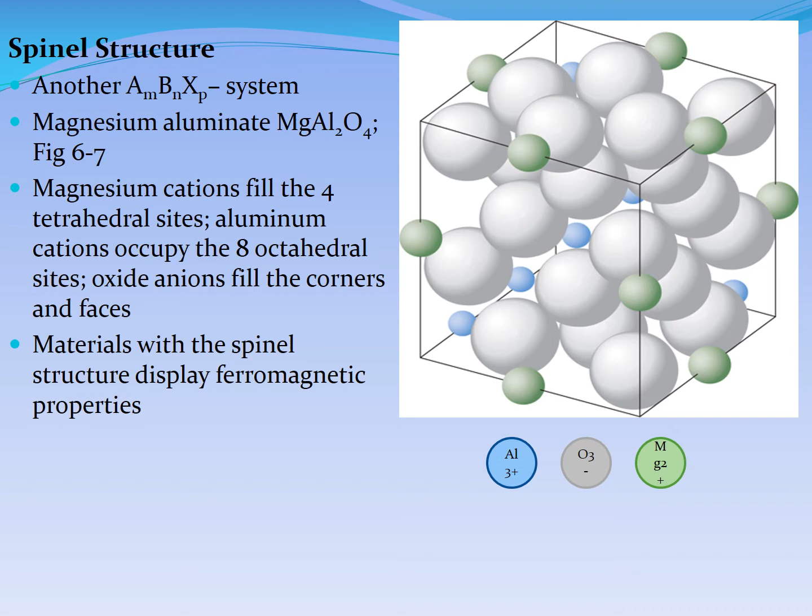But in terms of the calculations and understanding of the atomic packing factor and densities and so on, the examples we have taken are from the simple AX type. The AmXp, ABX types, you know them, but the calculations we will leave for some other time.

Phase diagrams for ceramic systems. Ceramics are represented by phase diagrams just like metal alloys. And if you remember, the most important alloy is like a ceramic in one way, right? There is a metal and a non-metal, iron and carbon, but it is a metal alloy. Here, if you say silicon carbide, then silicon and carbon make a very different one.

So the main thing is that there, for a large range from 0.5, 1% carbon all the way to 6+% carbon, the carbon and iron do not form a compound. There are phases of iron, and after 6.7%, the carbon and iron will exist completely as iron carbide. So this intermetallic compound iron carbide is in a small quantity and exists like a phase only.

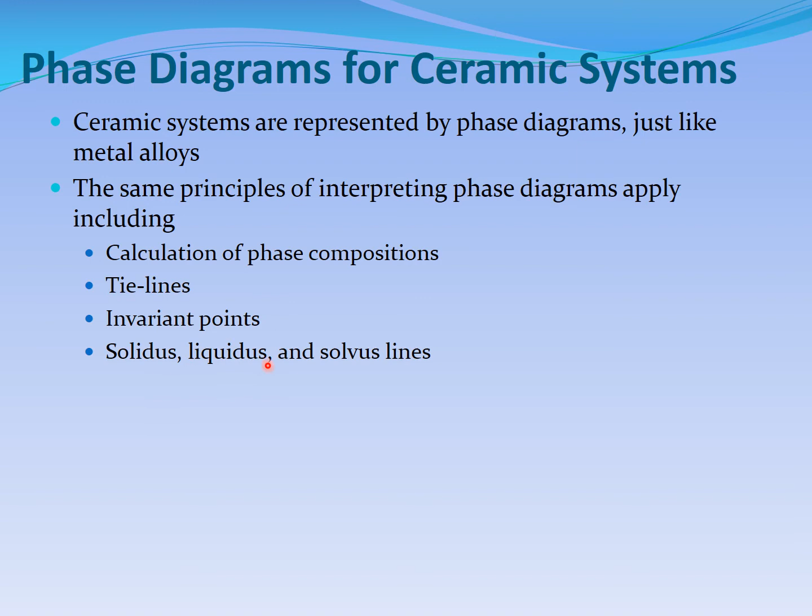Here in ceramics, the metal and the non-metal are completely there as a new compound, not in their individual phases. So this is the major difference: phase diagrams will be here also, but it will not be pure metal phase, pure non-metal phase, and so on. Same principle, but phase diagrams of a more complicated nature. Same principles for calculation of phase compositions, tie lines, invariant points, solidus, liquidus, solvus lines, all will be there.

For example, this magnesium oxide, aluminum oxide phase diagram. On one side you have magnesium oxide, on the other side you have aluminum oxide. Now these are individual compounds already, magnesium oxide and aluminum oxide, and then they exist together. So from 0% aluminum oxide to 100% aluminum oxide. And then there will be temperature.

But because this is already magnesium oxide, it is not that there is a melting temperature for magnesium and a melting temperature for oxygen. Actually for oxygen you can't say a melting temperature. Similarly here, what is the melting temperature for alumina, and in between. So there is the liquid region, there is the liquidus line, there is the solidus line, and so on.

So if you end up working in a place where these advanced ceramics are being made, first of all, any one company will not be making 10-20 different types of ceramics. Generally they will be specialized in only 2, 3, 4 types. So very quickly you will learn the chemistry and physics calculations and the materials engineering, and you will become quite good experts in a very short time.

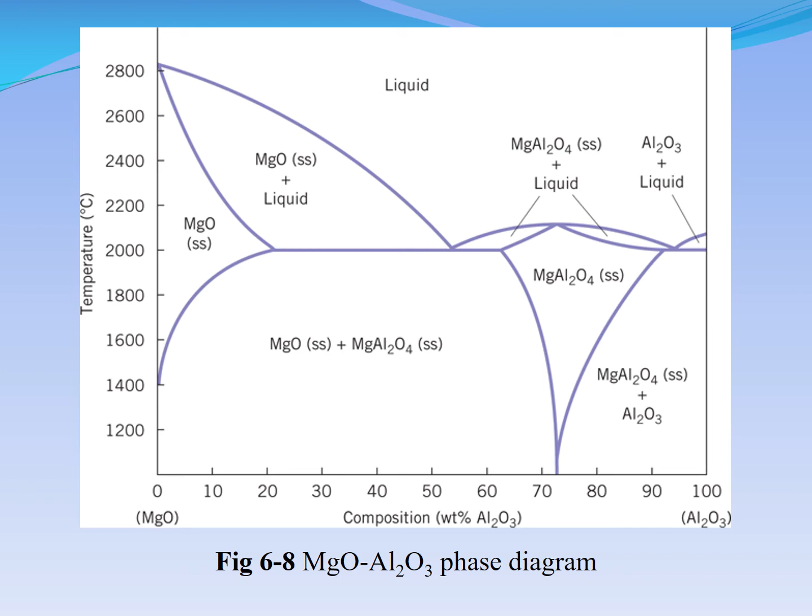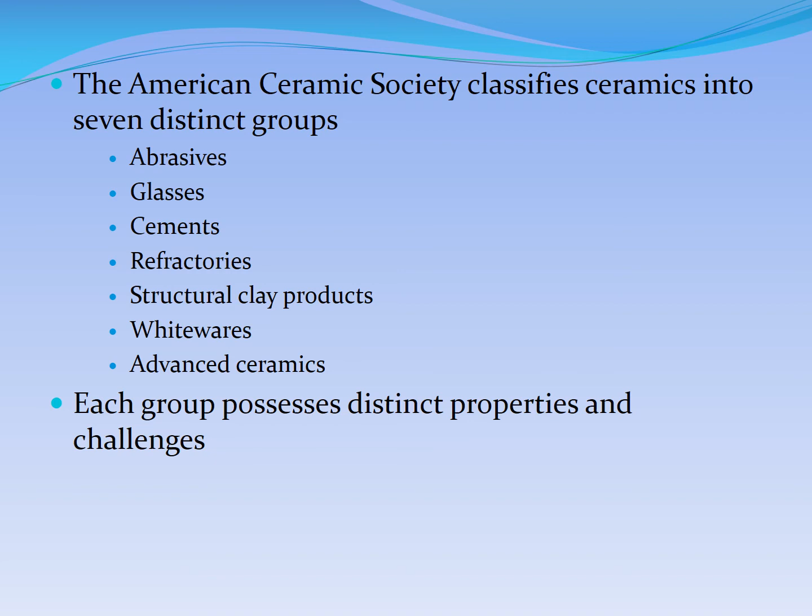What are the industrial uses of ceramics, right? Applications. So very quickly, the American Ceramic Society classifies ceramics into 7 distinct groups: abrasives, glasses, cements, refractories, structural clay products, whitewares, advanced ceramics. And each group possesses distinct properties and challenges, right? So these are all ceramics, and each one of them is a very different application and a different market.

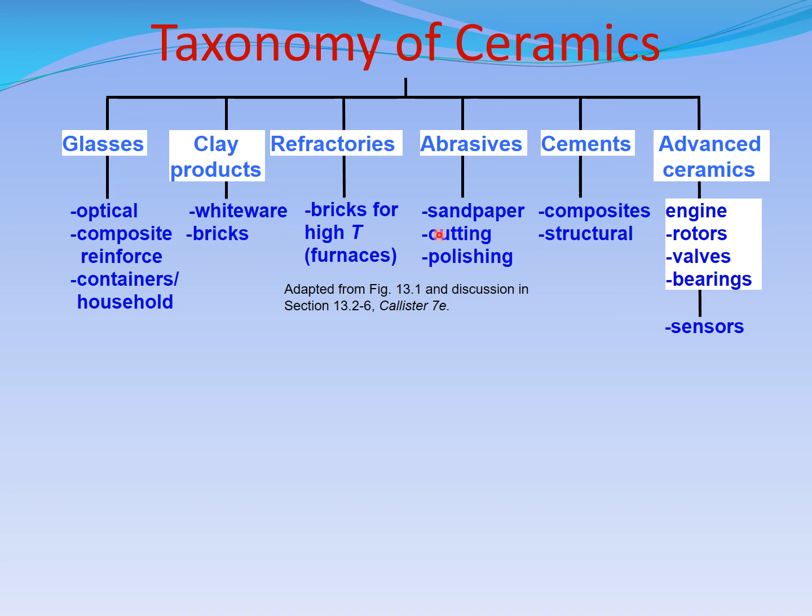So we have a taxonomy of ceramics: glasses, optical composite reinforced containers, clay products, refractories, high temperature resistant, abrasives for cutting and grinding wheels, cements, and advanced ceramics. Advanced ceramics in engine rotors, in valves, in bearings, in some sensors. So these are some of the latest ones, but in abrasives and others also there are many new developments being made.

Abrasives wear away other materials through processes like sanding, grinding, lapping, pressure blasting. The abrasive particle acts as a cutting instrument, ripping away parts of the softer material, like grinding wheels and grinding machines. Hardness is the most important property in an abrasive. Friable materials form fragments with sharp edges when they break under stress from heat and pressure, right? So abrasives are already very hard and sharp, but if they belong to the friable category, then they make small particles which are even sharper. So you apply a stress, they break, but they break into still good abrasives, right?

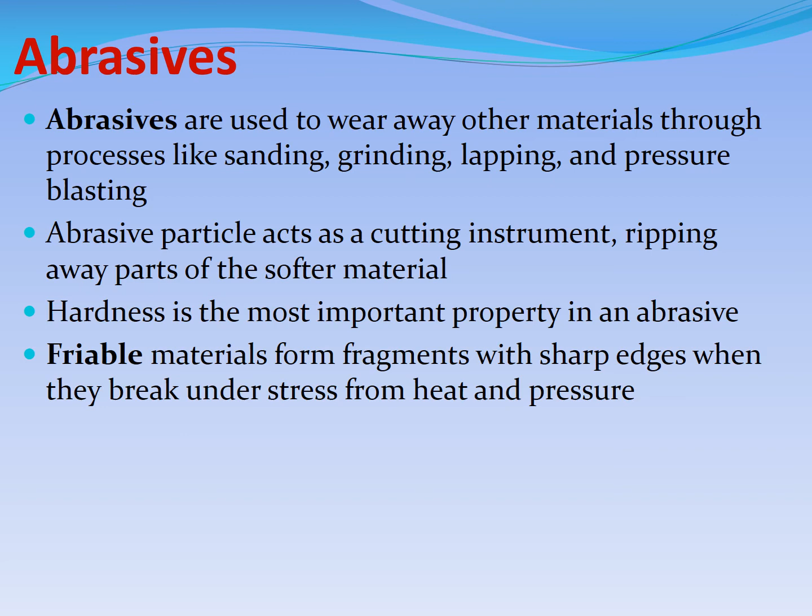Sandpaper, you have been using sandpaper from your first machine shop, workshop practice, and so on. It is the most familiar abrasive product, with hard particles bonded to a backing by a resin, like on paper or something. The earliest sandpaper dates back to the 13th century in China, where seashell fragments were bonded with natural gums to shark skins or parchments. So they were using natural skins, natural leather and so on, and seashell. They would grind the seashell and then glue it, and then use that as a sandpaper.

The first US patent for sandpaper was in 1834. Pieces of glass were attached to paper, so the name sandpaper. Modern sandpaper has evolved beyond glass. Some no longer use paper but mylar, cotton or rayon fabrics as a backing material. They are classified based on the grit size, which means number of abrasive particles per square inch. When the grit size number is smaller, it means the particles are larger, so the number of particles per square inch is small. So 40 to 60 is coarse, 80 to 120 is medium, then fine, very fine, extra fine, super fine. And uses range from stripping or large scale sanding, smoothing, final wood sanding, to removal of surface scratches. So these are different categories of sandpaper, right?

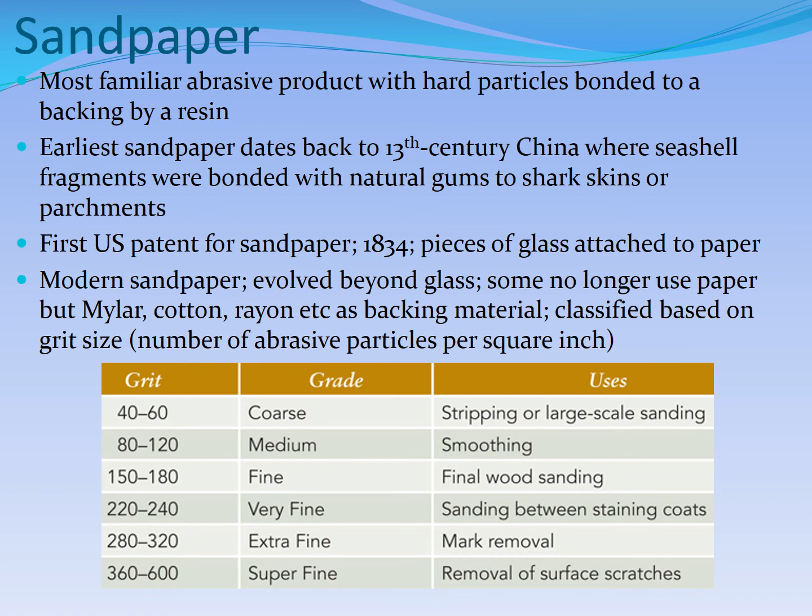Sand, glass, any other material which has been broken down into very fine and sharp grains, using some resin or some glue, is bonded to different types of paper or different types of cloths and so on. Abrasives used in sandpaper: 4 distinct types of abrasives are used in sandpaper: alumina, garnet, silicon carbide, and something called a ceramic. They are all ceramics, but this is itself called a ceramic. And each material is used for different tasks. So the sharp particles in the sandpaper belong to these 4 categories.

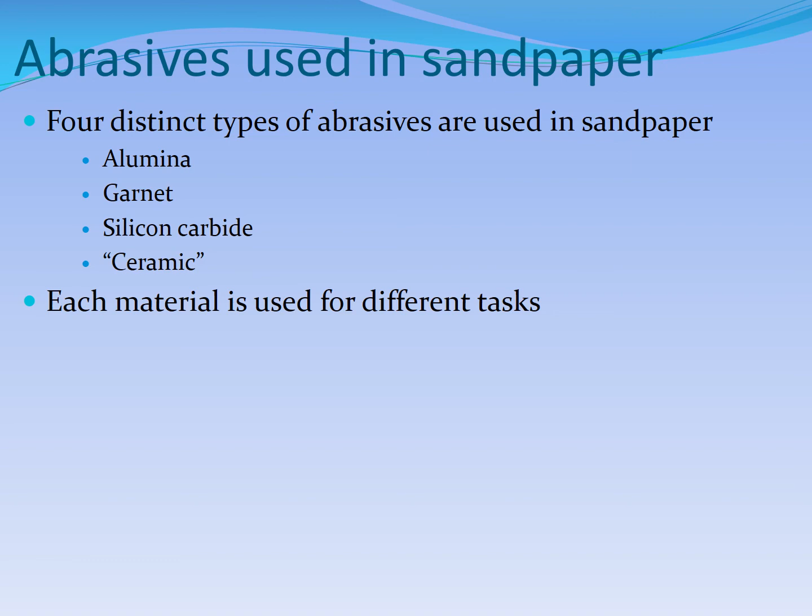So this is big, right? Simple alumina is very low cost, but if some chromium or some iron and so on are added to alumina, then you get very special gemstones like rubies and sapphires. So of course, you don't use rubies and sapphires as general abrasive materials unless you need some very high quality abrasive. Otherwise, standard alumina, which has this corundum type of HCP structure.

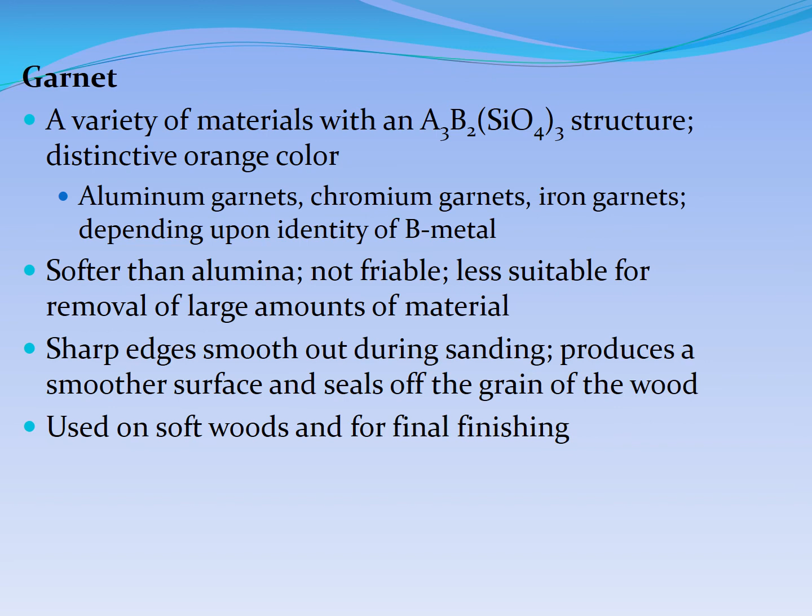Garnet, you already know, is a semi-precious type of material. A variety of materials with A3B2 silicate type of structure. So the A and B could be anything, but this is silicate, right? Aluminum garnets, chromium garnets, iron garnets, depending upon the identity of this material. Softer than alumina, not friable, less suitable for removal of large amounts of material, but still good enough for sandpaper. The sharp edges are smoothed out after some work, so it is used on soft woods and for final finishing, rather than for main scale abrasion like in a standard grinding machine and so on.